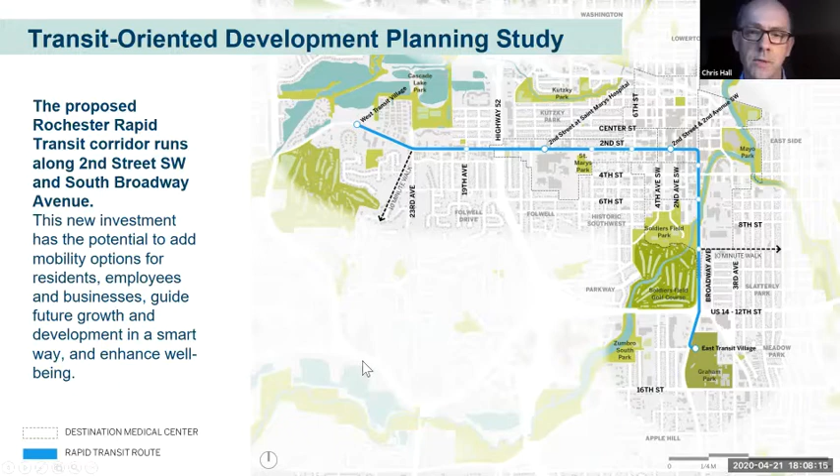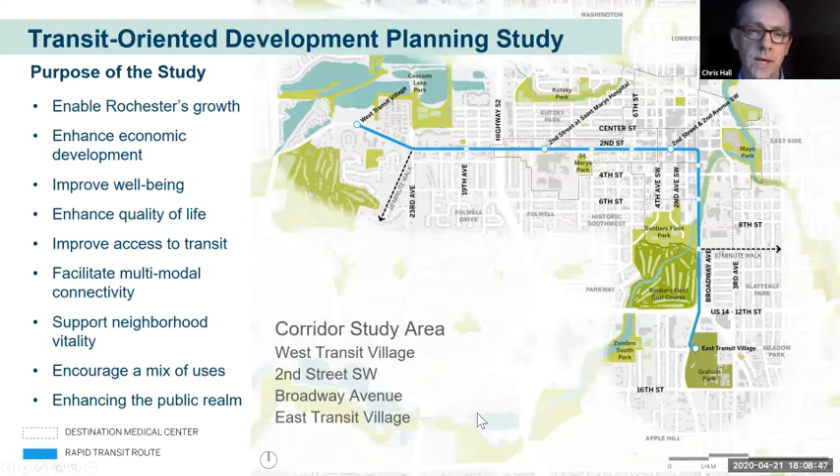And the purpose of this study is really to advance a number of components, enabling growth, supporting economic development, but also thinking about people's well-being and their quality of life in the future, as well as thinking about the specifics of the rapid transit system and how that may work and relate to other ways of moving around, and then encouraging a mix of uses and activities and public spaces that can really make this a dynamic and high quality corridor for the city.

And there are some larger goals as we go through this, linking transit and growth locations so that they work together and support each other, supporting downtown and making sure that it's dynamic in the future, ensuring that neighborhoods are livable. And one of the really important things is this is a rapid transit system that will support existing neighborhoods. And we really want to make sure that this is an enhancement to existing neighborhoods, as well as creating new potential neighborhoods, which should have a very high level of livability.

And then there's a strategic move here, which is to shift the way people move. So that there are fewer people driving in, perhaps on their own in cars, into parking structures in the center of the city or parking lots, but actually we have more people commuting by transit. And if they do drive in, they park once and then they can move around the city in lots of ways to go about their daily business.

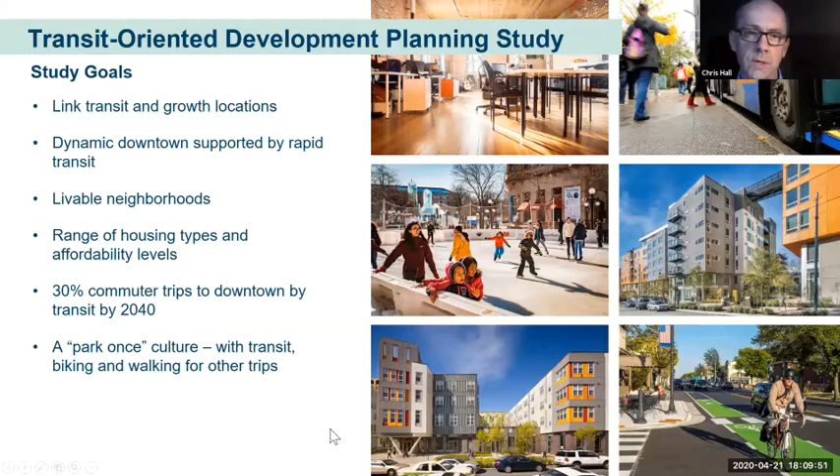So there is background in terms of a series of studies which have led to this study, ranging from the Downtown Master Plan over a decade ago, the more recent Destination Medical Center Plan, the Comprehensive Plan, a series of transportation studies that evaluated different alternatives for how the growth and new transit capacity could be added to provide additional service. And that's led to this study, and then it will lead on to an additional study of more detailed architecture and engineering.

And where we are in this immediate process is carrying out this round of engagement where we're really looking at high-level plans for station areas. And that then leads to a next stage of more detailed station area concepts, which we'll engage with you on again in June, and hopefully we'll see many of you in person, but we'll find other ways to see you otherwise. And then leading to an implementation and a funding application over the summer and in the beginning of the fall.

Next. And there are a few things we want to focus on tonight. We are looking at the Broadway corridor segment, and in previous rounds of the webinar, we've looked at the West Gateway and the City Corridor on 2nd Street. Tonight, we're looking at Broadway. In each of these webinars, we've looked at a series of key factors. Connectivity, which is a word we use to summarize ideas about where stations are located, walking and bike routes; land uses, which is the range of activities that can actually happen; heights and densities, which at heart is the scale of development; and then public realm, which is about parks, riverfronts, particularly in this area, plazas, and the quality of streetscape.

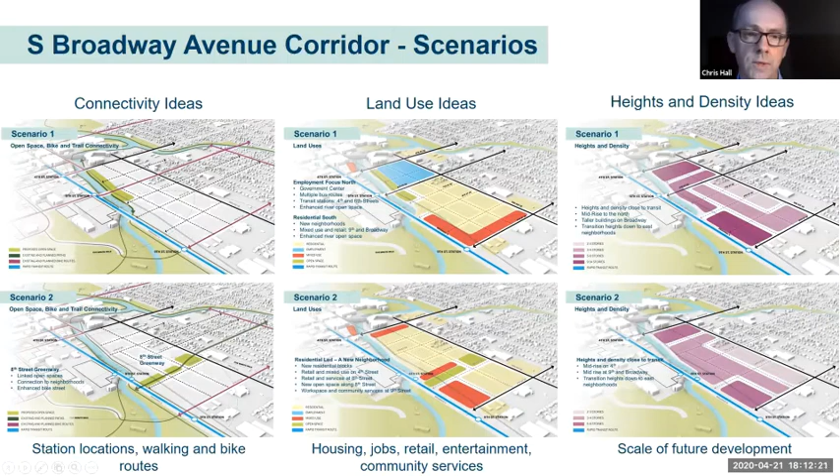And we'll come back to these, but these are just some examples of the types of diagrams that we'll be talking about tonight, and the types of diagrams that have been created for each of the segments that we're examining, which look at how things are connected, the land uses, heights and densities. And you can see here, there are some variations. As Jarrett mentions, there are some scenarios here given the scale of potential change. So at this point, before we go any further, we wanted to see if there were any immediate questions people had.

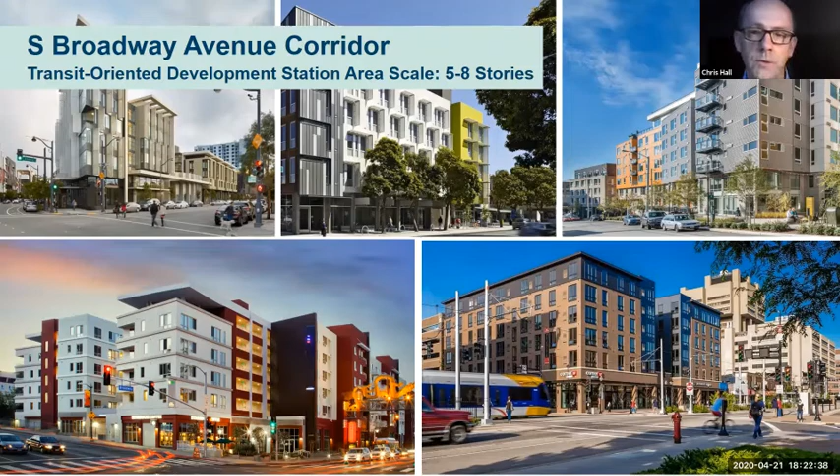Next. And given the proximity to downtown and the concentration of transit services, particularly on 4th Street and Broadway in the future, there may be opportunities for taller buildings along the primary streets. So next. But underlying this, there are some questions about what happens at the ground plane as well. So great streets, we think all of the streets should be great streets. They need to work for all modes of transit, and they should work for people in all aspects of their daily life and how they move around. So next.

And Rochester is a city that has larger regional open spaces, but maybe doesn't have as many of these smaller neighborhood spaces. So as we look at the Broadway corridor, we also look at connectivity as well. So what will be the most connected places in the future? So this is a way of looking at this area, which incorporates the rapid transit route, but existing buses, proposed bike routes, existing bike routes. So you can get a sense of what the connectivity framework will be in the future.

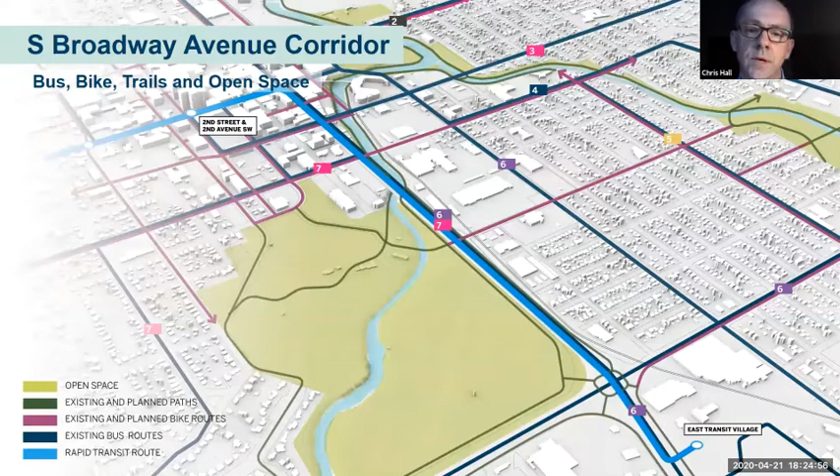And that gives us some clues about what the nature of activity, land uses, and development could be in the future. Next. And then we start to look at what we consider to be opportunity sites. And it's important to talk about what that means. Opportunity sites, and we are looking out over the next 20 years, opportunity sites could consider questions of vacant land, surface parking lots that may be underutilized now as a use, and which could be a higher value use for the future.

And then also the potential that some existing activities may relocate or choose to be somewhere else, or there may be transition in uses over time because of changes in the market. We also think it's important to note that there is no intention here to force anybody out that wants to stay where they are. And this is about creating development opportunities that integrate existing users where they want to stay, and supporting existing neighbors and neighborhoods and enhancing those where people wish to stay in place. So there is a collection of larger sites that do have opportunities for a range of different uses.

One of the things we did want to say previously is that there's going to be a more detailed study of this area over the coming months, potentially beginning in the summer, and that would run over the summer and fall. So once this process is completed, there will be an additional neighborhood planning process to set standards and requirements for the future for any development, public spaces, treatments of the riverfront that would occur in this area. Next.

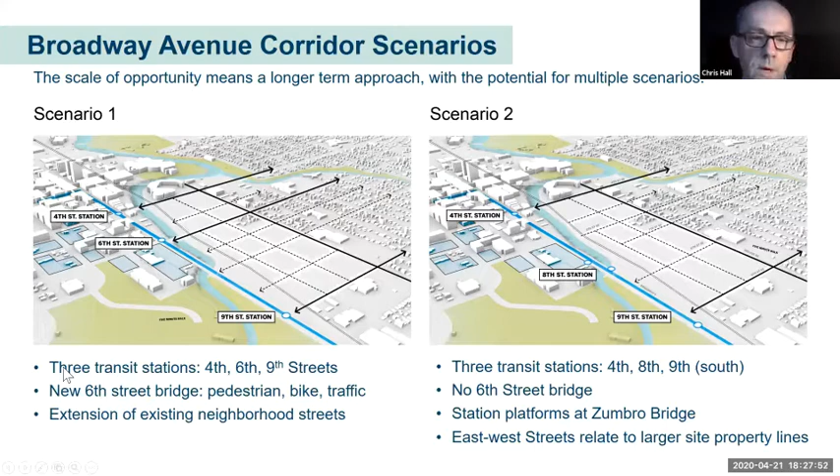There is also a difference in the sense of, do we just continue the existing neighborhood street grid and replicate that? Or do we anticipate that, given the scale of potential development here, and a 20-year time frame, individual properties may come along on their own? So thinking about some of the larger sites and larger ownerships that define property boundaries in this area, do we need to think about that? So there are a couple of different factors that inform our thinking about two different scenarios. Next.

And these are some of the questions and also some things that it would be useful to think about as we go through some of the detail here. So what do you think about the options for rapid transit station at either 6th or 8th around the Zumbro River Bridge? And that is a discussion point of the different options there. Should the area between Broadway and 3rd Avenue provide new jobs? Should it be an employment and economic focus, or should it lean more towards being a residential neighborhood?

And then open spaces, should they be focused along the Zumbro River, or is there an opportunity to create an east-west connection, which would link across the site and connect some of the existing neighborhoods to the east over to Broadway Avenue and to the transit service, and actually enhance connections to the river and to Soldiers Field as well. Next.

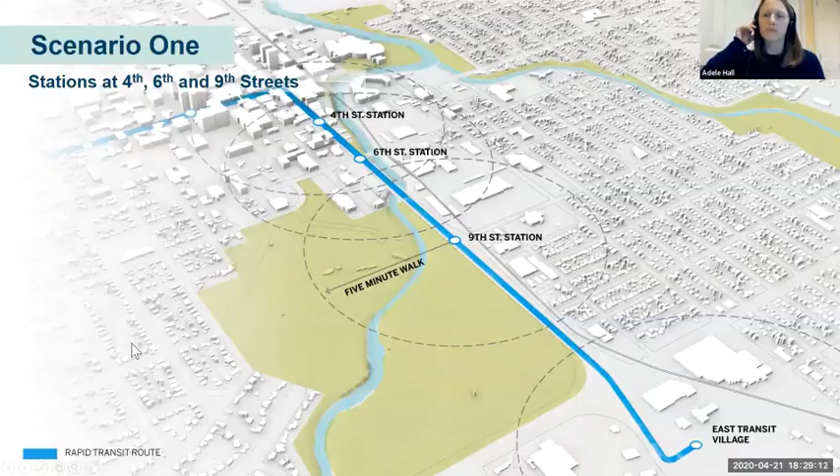Okay, so this is our first scenario. Next. And you can see here that in this one, the idea is that there is a station at 4th, 6th, and 9th. And Adele will talk us through the rationale for those station locations. Thanks, Chris. So here we are recommending stations at 4th, 6th, and 9th Streets. And before I get into the specific criteria that made these our recommendations, I wanted to talk through a little bit about how we evaluated station locations and came up with our recommendations.

There were a few things that we looked at. One was, does the station serve a place where people want to go? And not just a few people, but a critical mass of people. So we're thinking about things like employment density, population density, development opportunities that will bring more people or more jobs or more destinations to a station area. In particular, we're thinking about transit dependent populations, households without vehicles or low income households.

We also think a lot about whether it's easy to bike or walk to the station, easy to get to the station without a car, easy to take a bus to transfer at that station. So we're looking at things like the connections in all 4 directions from a station, especially on foot.

We're thinking about not just are those connections there, but what's the quality of those connections? What is the streetscape like? What is the walking environment? Are there bicycle facilities on the streets or adjacent to those streets? Is there pedestrian scale lighting? Are there shade trees? All these kinds of qualitative things that make a walk or a bike easier to a station.

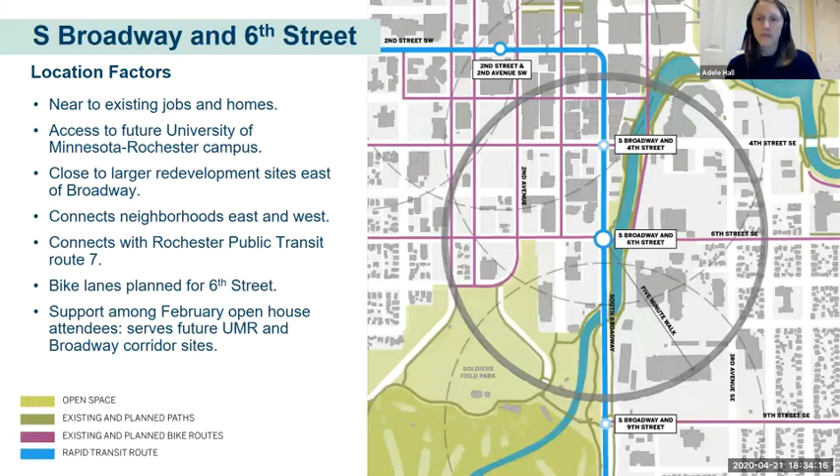So finally, 9th Street. This is a logical station location because it is the most direct connection today to Slatterly Park. And obviously 9th Street has or is planned for a bike lane, and is the most direct connection to Slatterly Park. Of course, it serves Soldiers Field Park as well.

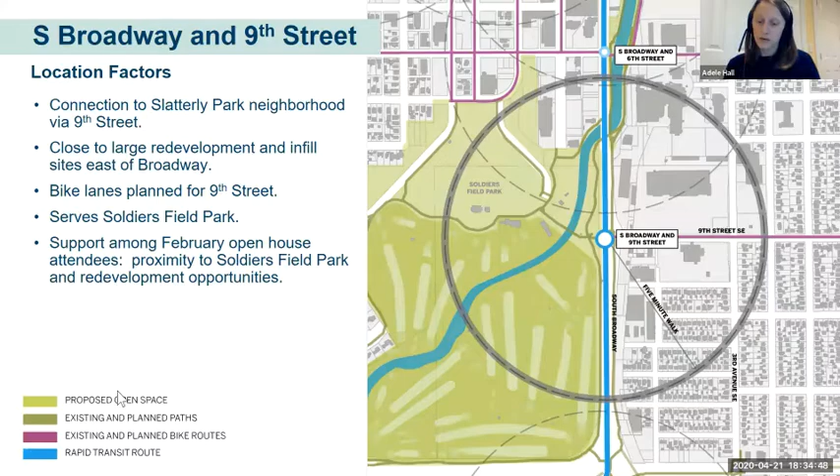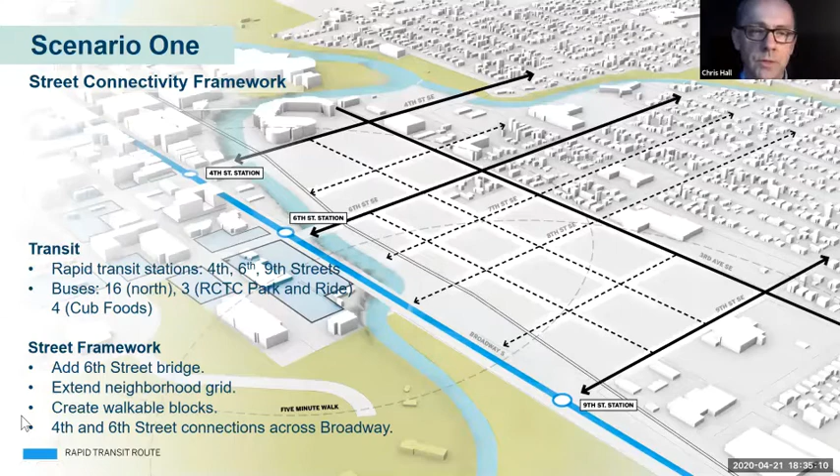Okay, so having seen the ideas for those station locations, this is a series of diagrams that talk about how we would potentially relate future development on opportunity sites to those station locations. So this shows the street connectivity framework, and as we talked about before, there were really strong connections on 4th Street, potentially a really strong connection on 6th, and then another community connection on 9th as well.

And this is an opportunity to kind of continue the street grid from the east. So you'd have continuous connections from neighborhoods from the east through this area and connecting to the river, but also connecting to Broadway and the transit assets on Broadway.

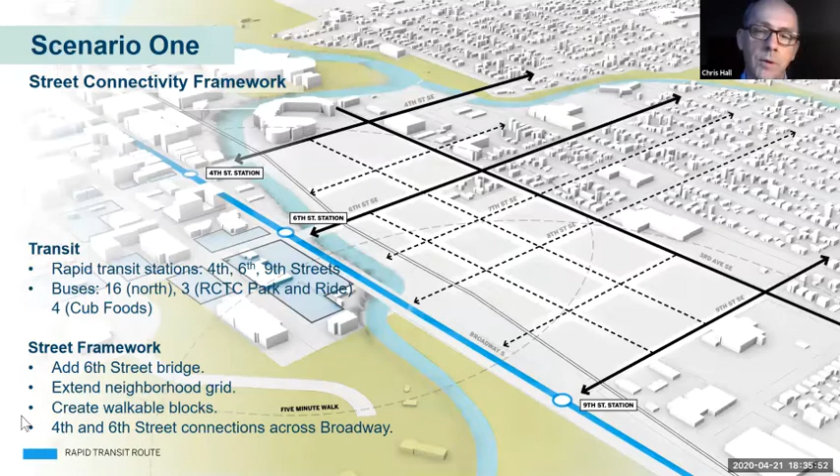And the riverfront really is kind of a jewel here. You know, it's a really important opportunity with the riverfront, and this is something that other cities have really embraced, and Rochester has embraced this river as well. This is an opportunity to continue that further to the south.

There are lots of different ways of doing this, from very naturalized approaches through to more ornamental or engineered approaches. Each of them can be spectacular in their own way and create a destination and an asset that existing residents, future residents, and future workers can use. Next.

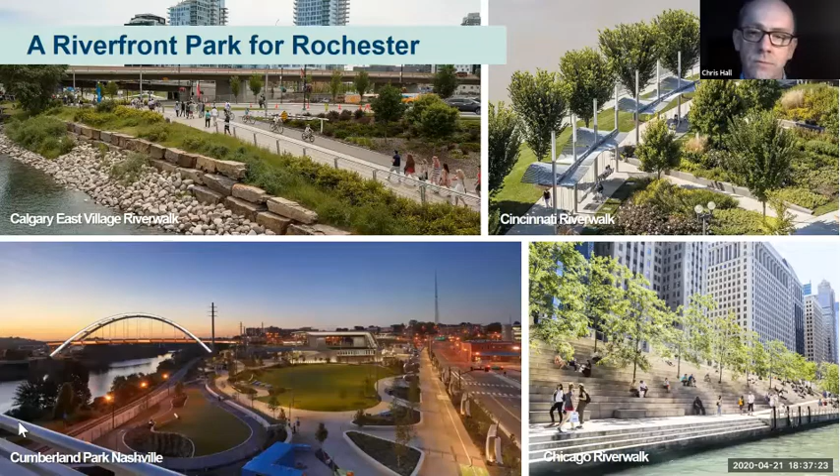So looking at land uses in this scenario, one of the key things to pay attention to is that we are looking at an employment focus to the north. So the government center is to the north. There's significant employment in the area already in terms of office employment, but also other employment in terms of hotel, retail, smaller offices, services. So we thought there was an opportunity to explore employment focus at the north to continue that economic focus of

an expanding central city. And then to the south would be a more residential focus, but then including mixed uses. So we mean retail, community services on 9th and on Broadway as well. These are close to the transit station at 9th, but also highly accessible to existing residents in surrounding neighborhoods.

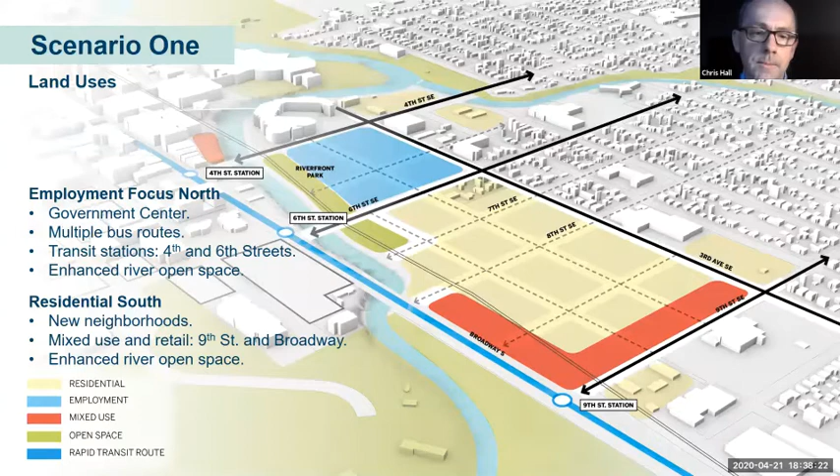So I think we can open it up. We will go into the second scenario and talk about that in more detail in a moment, but we thought it'd be interesting to open it up for questions now.

Thank you, Chris. We currently don't have anyone with their hand raised, but we received several questions in the last 10 to 15 minutes. One of them I want to direct to Adele and get Adele prepared to talk a little bit about what these stations might actually look like and what future information was taken into consideration when planning these stations.

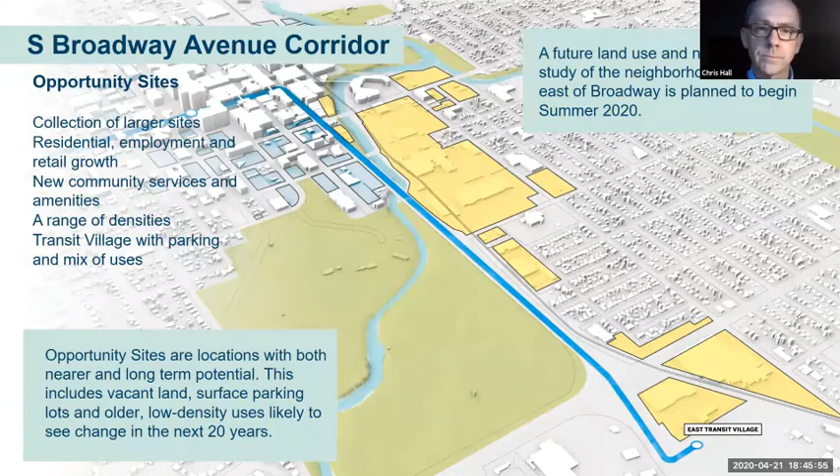Thank you, Chris. We have several more questions that have been submitted, but in the interest of people's time and trying to keep us to an hour, I think we should move forward. And Chris, could you please continue? And hopefully we might be able to answer a few of these at the end. Yeah, and we'll move quickly through this so we can come back to a question.

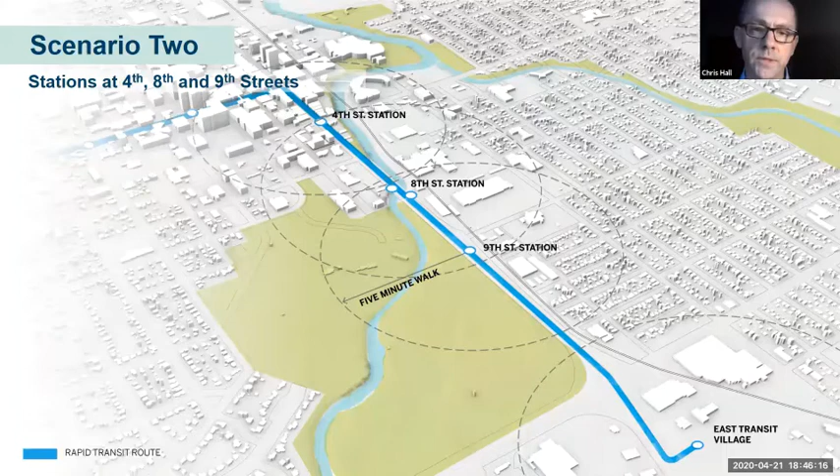So in scenario 2, this is a different approach where there are stations focused at 4th, around the bridge at 8th, and then south of 9th. And the key difference is that there isn't an east-west bridge over the river at 6th.

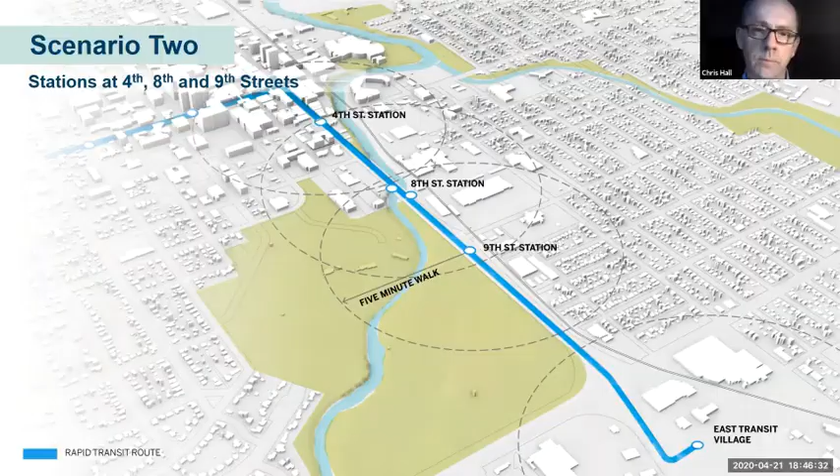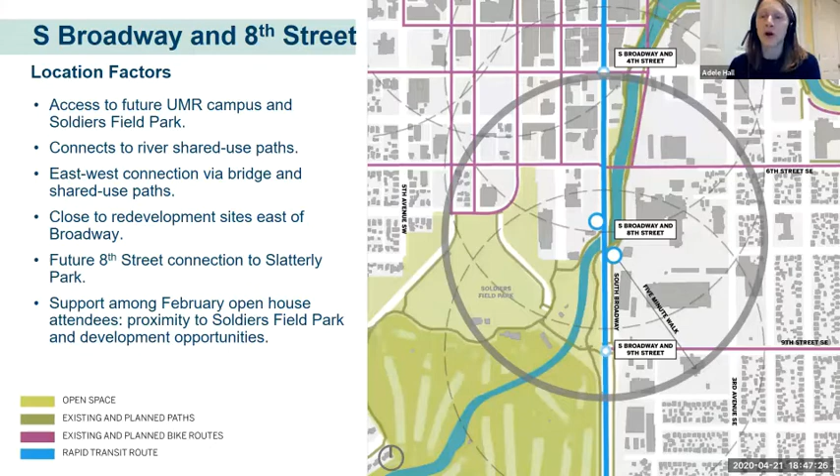So looking at the 8th Street station location, this location was chosen because it does offer connections to neighborhoods and opportunity sites on both sides of the river, even though there isn't an east-west bridge in this location. But it is very much a future-looking station in that a new connection between Broadway and 3rd on 8th Street would need to be made. And that would allow for access to those opportunity sites and a better connection to Slatterly Park from this station location. It does serve the UMR Future Campus, and of course connects to Soldiers Field Park and the trail system along the river and in the park.

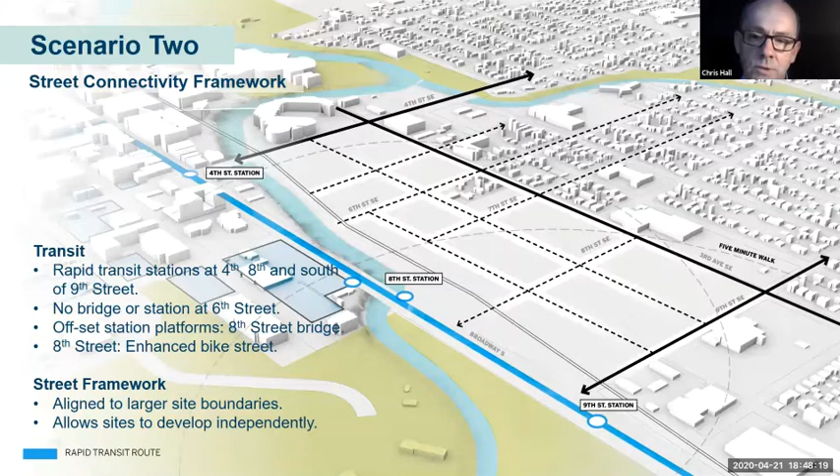You can see the effect here of 6th Street not coming through, and also the effect of thinking about larger property ownerships and those boundary lines as defining characteristics for a street grid. So the idea here is that with stations at 4th, 8th, and 9th, we would align an east-west street framework, perhaps more organized around some of the larger site opportunities. So the street grid wouldn't connect exactly in the way the east-west streets do through neighborhoods right now, but 6th would extend into the site, 7th would extend, and 9th would still be an important connector through the site.

So next. And you can see here, our connectivity and open space framework is slightly different as a result. You can still see there are strong connections on 4th and 9th. And then we look to an idea that there could be a new 8th Street connecting through the site, and that would be a greenway as well. We see that as a series of open spaces, but also a richly landscaped street for walking, for cycling, vehicles as well, but a really strong emphasis on other ways of moving. And these series of open spaces would be a destination and resource for existing residents as well as new residents.

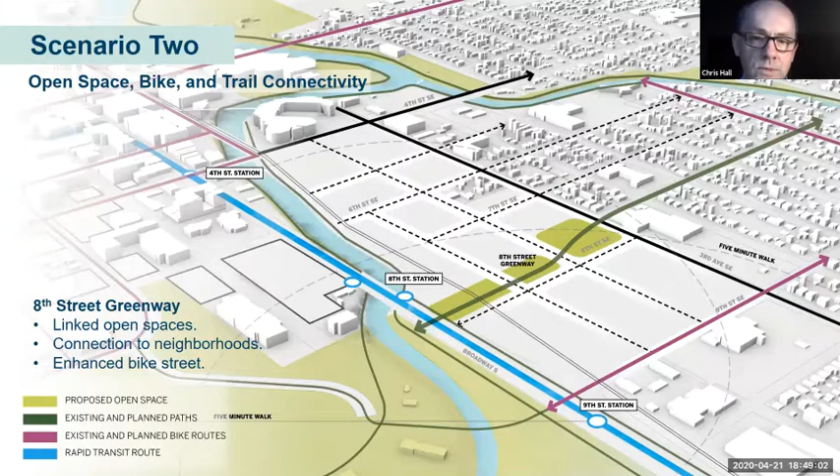And then with the land use scenario here, we've done something slightly different. This is much more of a residential emphasis, so less emphasis on employment at the north. So a series of residential blocks and then some focused areas that have mixed use activity. That mixed use could include employment, but it's likely to be retail. It could be hotel, could be community services as well. So focusing that on 4th Street, again, where there is a lot of transit connection already, it's a very accessible place and is close to downtown as a destination.

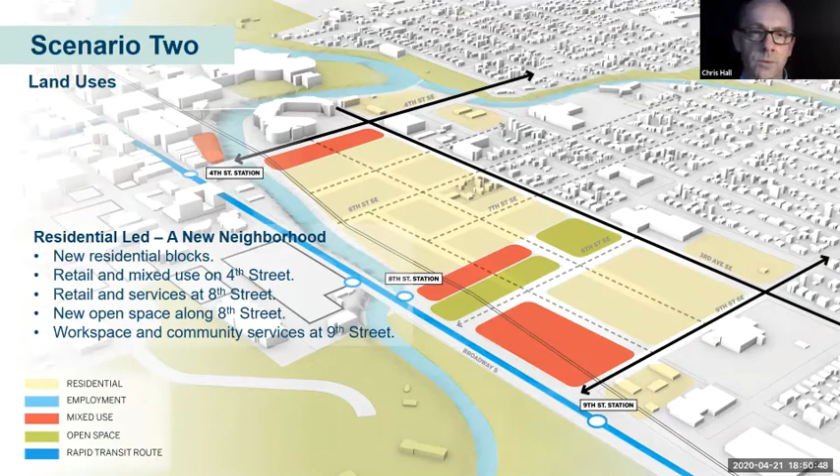Looking at 8th as well, so having a mixed-use focus around the station, but also addressing the open space, and maybe those things could work together to create a really high-quality and exciting urban place. And then looking at, again, a focus for mixed use on Broadway and 9th. Close to the station, this could include workspace. It could have a community services focus as well, highly accessible for people on the BRT, on the rapid transit route and coming into the city by bus, but also highly accessible to residents of surrounding neighborhoods.

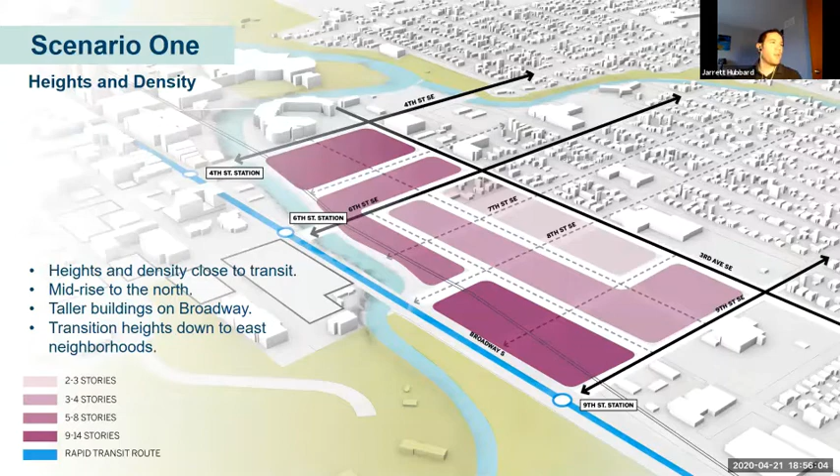We received a question related to the 8th Street station location and how it's split on either side of the bridge. And essentially the question is, has there been any consideration of something like a pedestrian scramble level below the bridge deck that would allow people to choose which direction and which side of the river they would want to travel and stay away from the traffic and all dangers?

I can speak from the city standpoint and say, no, we haven't explored that type of concept, but we definitely can if 8th Street is one of those ideas that's really supported by you, the public. Once again, these stations that we're proposing here today are just put out there for the public, for you to respond to and critique and give us a response. If you don't like one of the locations, I definitely say go ahead and submit a new location.

Chris, have you seen something like this before that's been asked in this question? You know, it's an interesting idea, and I think it's a question of what the required navigability of the river is. Is there any boat traffic that would still need to travel, and what are the clearances? But it's an interesting idea to put a pedestrian connection at the river itself, so that people could make that crossing without having to cross traffic on Broadway.

And of course, any crossing there would require a pedestrian signal and those kind of controls. And right now, to make that connection, you would have to go down one side, under the bridge, up the other side, and then continue on the sidewalk once you get there. But it's an interesting idea. I think that's the kind of creativity that would be really welcome and could give some identity to thinking about the future of the river.

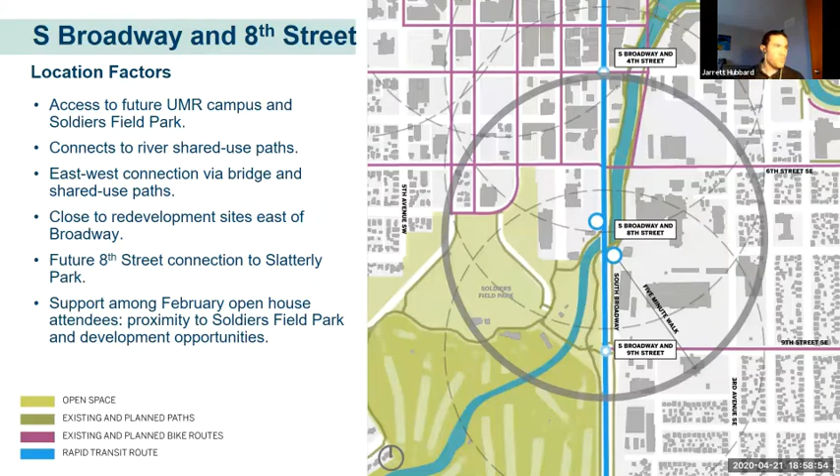Let's see here. Maybe another question here. Adele, access to the Skyway. Was that considered? And particularly the person that was asking a question about not only access and the station location and access to the Skyway, but particularly about some of the Skyway and subway issues that we might have for hours that they're open and closed.

Yeah, so Skyway and subway connections were considered in placing the downtown station. I don't think we went so far as to consider the hours of that particular entrance, and that's a really good point. And I do think that it's interesting to think about the future of the Skyway and subway system as well. I know we've talked a little bit about that with a 4th Street station, that perhaps there are eventual connections, one to 1 Discovery Square and 2 Discovery Square when they come online. And so a relatively quick access into the subway and Skyway system from there as well.

But I believe those are the only 2 stations that are proximate to an entrance. We had another station proposed at 6th Street, but I think that one's still a couple of blocks away from the nearest building entrance, if I remember correctly. Yeah, I think you're correct in that, Adele.